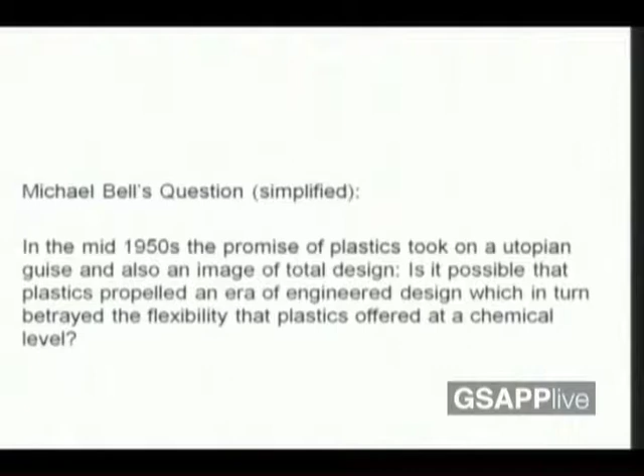I want to start with Michael's question. In the mid-1950s, the promise of plastic took on a utopian guise, and also an image of total design. Is it possible that plastic propelled an era of engineered design which in turn betrayed the flexibilities that plastic offers at a chemical level? And my answer is yes.

It actually depends if we're talking about plastics in the context of art, architecture, engineering, product design, or urbanism. Today I will talk about art and architecture because I feel they relate to the issue of plastic promise, total design, and betrayed flexibility, and also because I've been looking for an occasion to talk about this because it's part of my immersive interest right now. And so...

When we talk about art and life, we go to Warhol in some extent. So I want to be plastic. And so plastic is this - it's an immersive material. It's everywhere that we turn. Architecture is also everywhere, but at the same time, both architecture and plastic have the task of remaining unobtrusive, unnoticed. So at once they're everywhere, and at the other end, they're supposed to not call too much attention to itself. At least that's one of the ways in which I see architecture.

This is Michael Heizer's installation at DIA. It's a precipice of 20 feet, and he wanted to do it without a railing. We tried to convince the building department of the city of Beacon to do it without one. Luckily the building department was our alter ego and said no, you have to have a railing. That's a good thing, because on opening day my mom walked to the edge, thought it was a painting on the cement, and almost stepped in. So that's about risk and safety.

Andy Warhol again, and the Velvet Underground, and the Exploding Plastic Inevitable show. This show was in 1966 on St. Mark's Place. He rented, for $150 for one month, a place that was a Polish community center, one room, about 30 feet by 25 feet.

Now it's a mythical show, one that's in every book about pop art. But it was actually almost a pathetic event. Imagine a room in a community center on St. Mark's Place in 1966 with inflatable pillows on the ceiling. I want you to see this moment where you do something that's almost silly, but at the same time it's your guts out there.

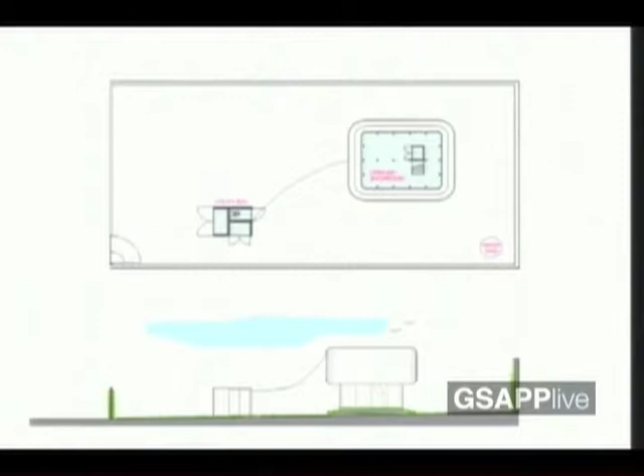Another thing that ties plastic to an important part of our lives is plumbing. Plastic carries water in an amazingly efficient way. Whether it's for fun, like here, or for piping and water tanks we'll see later, it does this very well.

Another thing touched upon yesterday was the idea of the brick having a textile quality, allowing us to lose sight of the fact that a building is made out of parts. If you put enough small bricks together, they disappear, like the weaves disappear in a scarf—they merge into the total form.

So this is a project, the effective brick—this is my ridiculous moment. I tried to take the brick to the limit of what it can be. This was a show at Artists Space, curated by an artist curator, and I tried to do a wall.

First I started digitally, and it looks more dignified when you look at digital images. But then when you go to the actual painting and mold making—we did 30 molds and cast 650 bricks, hydrocal bricks for this. All my students, some friends did this. Some molds are made of rubber and silicone.

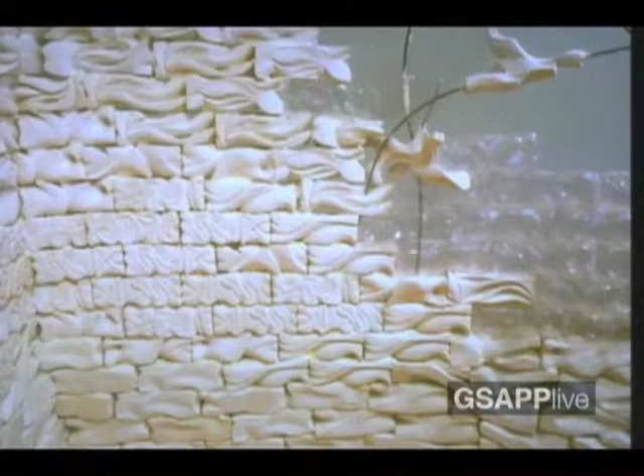And then I did these plastic bricks that are vacuum-formed styrene bricks, and that was it. I'm ready to do another version now—if anyone is interested in taking that experiment further, I am too. So that is the installation as it was done with 600 bricks at Artists Space.

The last thing I'll show you quickly: water tanks in Rio. Last year we had a studio on Rio de Janeiro and the Olympics, and one of the students, Nick Hopson and Clara Rodstrom, did this project consisting of 600 balloons that could reconfigure in different ways—for example spelling 'Rio 2016.' The balloons had water tank and internet functions within them.

A big balloon would collect water, with a gutter all the way around so it could collect all the water, then the water could be nested in the tank. The tank water could be filtered to become drinking water, and there was an antenna connected to it that provided internet service for the neighborhoods.

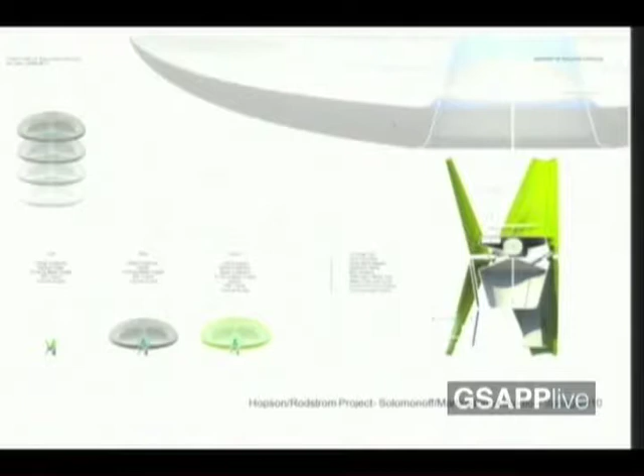At the beginning of the Olympics, they were all going to be grouped together. Everyone could log in—all visitors to the Olympics could use the 600 capsules as a telephone unit, or computer unit, and then they would travel to the different neighborhoods that needed water supply and internet.

So this is the balloon's kind of cycle: rising up, using air to transport, and being directed to a new location. This is a balloon at the pier, and that's a balloon in the neighborhood. This is the closing ceremony of the Olympics, where all the balloons would be let go together.

And so this is where I go back to Warhol and the idea of an amazing party—not an amazing party as a waste, but an amazing party because we deserve an amazing party.

Parties are what we've done since we were primitive people. It's what brings us together, it's what communicates. And so I imagine the event, the party, as being as important to the people of Rio as it is to me or to anyone here, and as a serious thing that an architect could get behind and design.

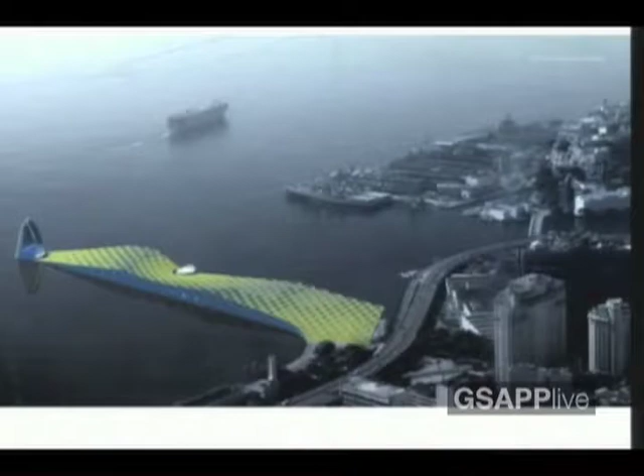And so this is the closing ceremony, all the balloons going to the neighborhoods. The pier now transitions into a market with some open air solariums, and the market is underneath. The balloons go to the neighborhood. This is the neighborhoods that we were looking at. And this is the post-Olympic landscape of Rio de Janeiro with the balloons in the different neighborhoods and the pier being a pier.

And then the last project that I'm going to show you, it's a pavilion that we're doing this summer. And so we look at the history of pavilions, a pavilion being an essay of architecture, kind of like it combines the ability to do something radical and extreme with the difficulties of building something.

So I don't want things to remain digital. I have nothing against digital anything. It's like, what I feel is it's much easier to look silly and ridiculous and exposed when you're dealing with materials and you made a miscalculation than it is to do that when you're dealing in the digital realm.

So we choose three pavilions that we really liked. We analyzed them. We analyzed all of them. And then I'm working with Liam Gillick, an artist.

So the question is, why do I bother working with an artist? Well, I'm interested in learning how to do things. I don't necessarily want to follow the way things are done anywhere. And that leads to an unsafe territory of experimentation that is often more at home in the artist's realm.

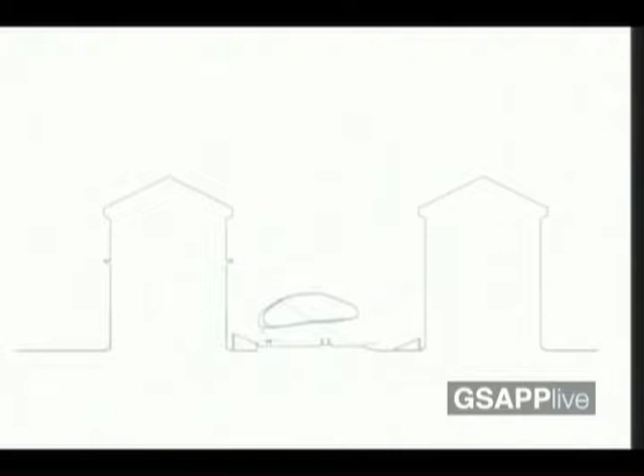And that's a public bathroom, that's a cloud, and that's the end. Thank you.

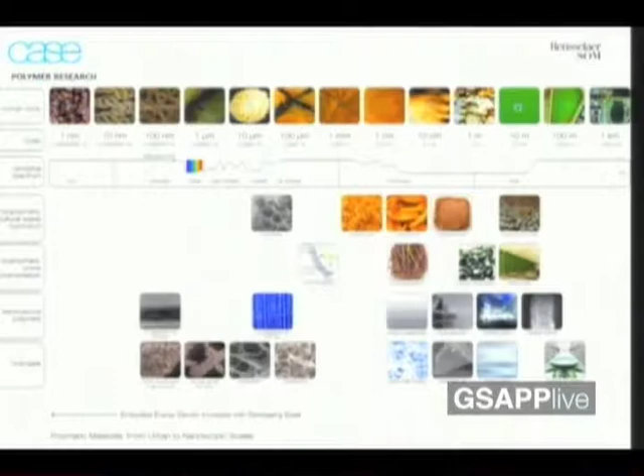I'm going to present this on plastics as a companion piece to what I presented at the Metals Conference last year, which was looking at how we manipulate a material at multiple scales—especially how we can now use computation to literally design the morphology of materials at multiple scales, potentially simultaneously, and look at those interdependent relationships across scale.

But what's amazing about the polymer family is that we're at a moment where we've extended ourselves so far in the engineering of materials that it's meeting something where our understanding of the geometry of biotic processes is converging with our understanding of the manipulation of materials, such that it might be so-called biocompatible material.

I'll use a simple analogy, since it's one of the materials we're working with right now: hydrogels, close relatives to contact lenses, or what you have in your eye. For those old enough to remember placing a glass contact lens into your eye, maybe 20 or 30 years ago, remember how uncomfortable it was to put ceramic into one's eye—but somehow a polymer is almost imperceptible.

It's an amazing thing, this blending of processes with a phenomenal level of engineering at an extremely small scale—all the way down to this kind of manipulation at the nanoscopic level.

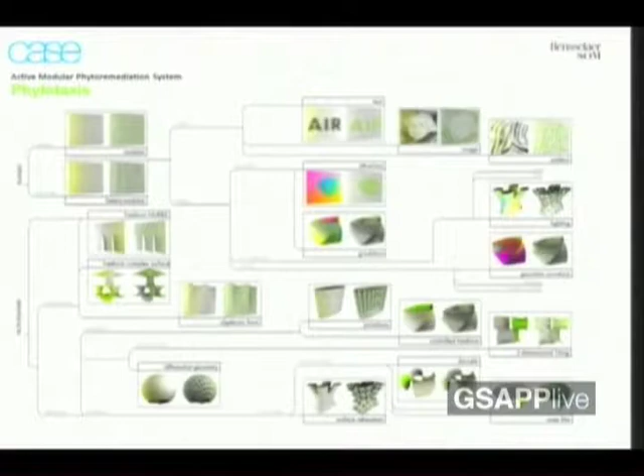We over-design everything, and we really don't understand those processes in terms of what we'd call built ecologies. So these studies are really looking at the relationship between the fluid dynamics of air, how it moves through a room, a building, or even a district, and then all the way down to that small scale, the micro scale of the root rhizosphere, and what happens when you go all the way down.

It just so happens that those images I just showed are plastic modules, and we're definitely looking at all of these existential questions relative to plastics, such as design for disassembly, reassembly, design for recycling, biopolymers, biodegradability. There are epic questions right now with respect to what we are doing with plastics and how they participate in future ecologies.

But geometrically, what's fascinating is another NASA discovery about the relationship between minimal surfaces and flow, which also emanates from biology. So I want to constantly reinforce that so much of these discoveries and our relationship to polymers show a crossover that is really coming to a head.

In our work, in a very particular way, we have these kinds of—I love Galia's characterization of a kind of goofy, ugly phase that things go through, because, to be honest, we constantly talk about our stuff as a kind of high wire act without a net, and this is one of them. This work is really proposing that you could produce fresh air from within buildings. Would they be airtight? Maybe. If you live in Bangkok, maybe you want a tight building.

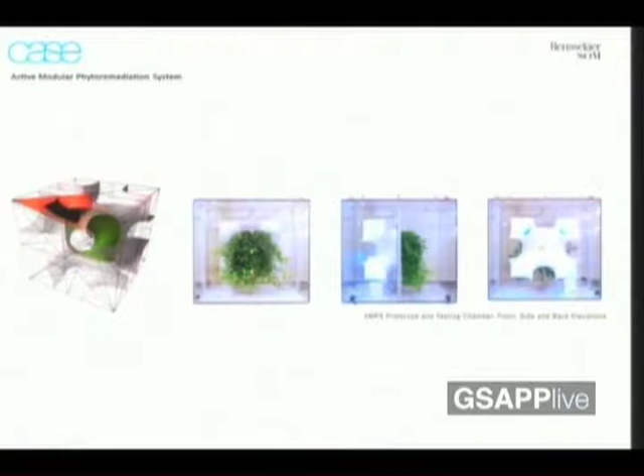In terms of the relationship between the manufacturing level and the biotic level, we're constantly looking at how much built material versus natural material we need, and what that relationship is. It's this ugly, awkward merging together of biotics, mechanics, and polymers into a performative prototype that can perform the best we know how with existing or emerging technologies.

It's certainly at a highly experimental phase. I don't know if we can come up to the ankle of the Slow House by Diller and Scofidio, but we're in a very investigative period looking at the relationship between flow. If you look at a square room, the question is how does the airflow go through it? It's in a very different form than what you actually see in front of your eyes. So what is that relationship between form and performance in terms of the dynamics?

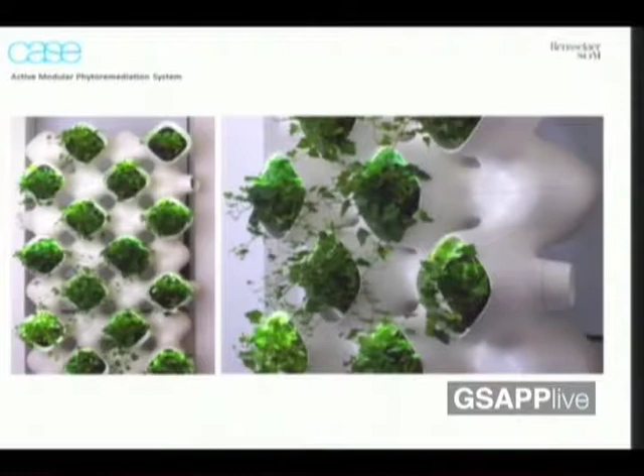This is an example of a prototype here in the lobby of Skidmore, Owings & Merrill, one of our partners, actually our principal partner at CASE. We moved this prototype through different capacities in different rooms, testing the remediation of toxins and the relationship between species and performance.

Ramping up in scale, looking at these large-scale constructions, a proposal that gets incredibly rationalized in this case, so that the optimal geometric plastic relationship to dynamic flow is not necessarily always viable in the real world, given certain constraints within constructions and the orthogonal architectures that we're placed into.

One of the aspects about dynamics and control that brings to mind—are we really comfortable with bringing natural processes and natural systems into our environment wholesale? There are huge cultural ramifications.

Going down in scale a bit into the filming of polymers onto substrates and materials is a very interesting possibility to have reactive conditions whereby the exchange of information is possible.

This is an area of inquiry we have looking at the adhesion of electroactive polymer to basically IGU units or window displays. If you think about ceramic frit that's fixed and non-reactive, we're looking at something like a movable frit that can be any pattern depending on what you program for it, or that can be opaque, translucent, and everything in between.

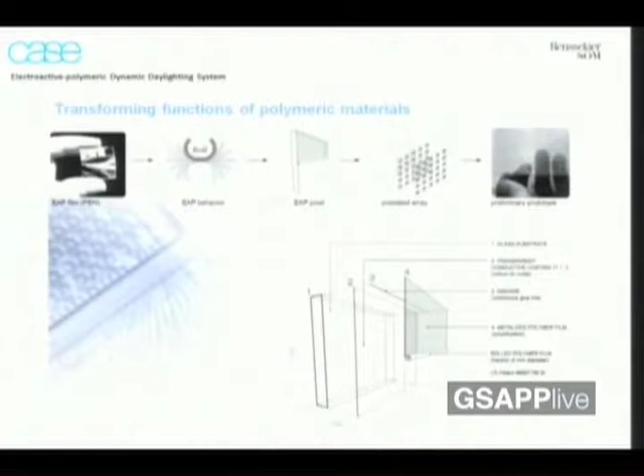Transparent is actually its default condition. It also can be scalable—you can start to sculpt space or change the shape of space. You can change the effective heat transfer characteristics of a building envelope very quickly within a switch, in terms of how it absorbs solar heat gain and responds to glare, etc., with geometric properties built into the microscale of the material.

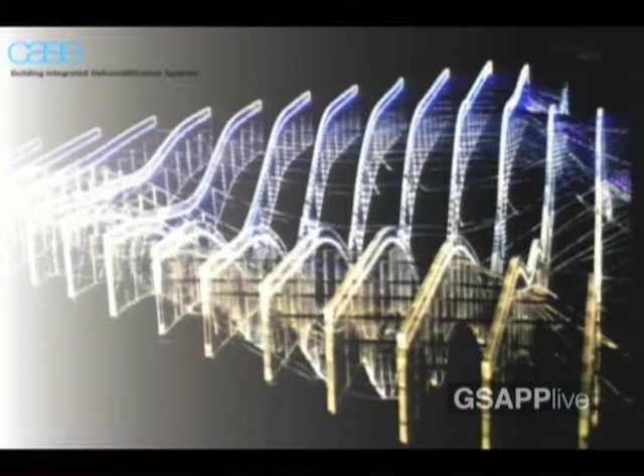I've just been given minutes, so I'm going to flip through quickly, since I think it's better to have an overview of the discussion. I mentioned contact lenses—this is literally a ceiling made out of contact lenses. It's an intelligent hydrogel geared towards hot, humid climates. In this case, there was a test bed for a projective building for the Mumbai airport.

So what we're really doing at CASE is projecting into the future with existing technologies, looking at a time period like the Mumbai airport. Galia's comment about water is great, because we think about the relationship between polymers and water like this—this is a hydrogel, a material that absorbs water and captures it for potable water purposes and redistributes it, also potentially changing the psychrometric profile of the city.

A city like Mumbai unfortunately has tremendous humidity in the air, but very serious water shortage problems. I probably have no time right now, so I'm just going to flip through these slides quickly.

I want to end on this note, looking at post-agricultural waste byproducts. I want us to think about polymers in a very large sense. There are manufactured polymers that have tremendous limitations and in certain cases serious nefarious effects on the environment, but we also have a very large range of polymers participating in

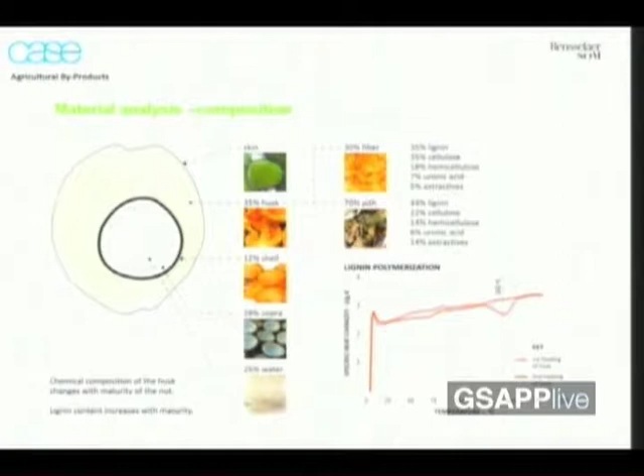many different processes that we have. If we look at the relationship between food production, the natural processes we're using, and how we're actually using them, we have enormous surpluses of so-called polymers that can participate in biopolymeric processes for building materials, for the gestation of different metabolistic processes within buildings, whether it be energy, water, toxin remediation, et cetera.

This is a very low-tech process—literally heating at a fairly low temperature coconut coir and coconut husk, of which the dramatic majority of these materials are wasted throughout the hot, humid belts that probably need them the most, because they're building with very heavy thermal mass concrete buildings predominantly now in these belts around the world, dramatically changing their microclimates and their requirements for cooling.

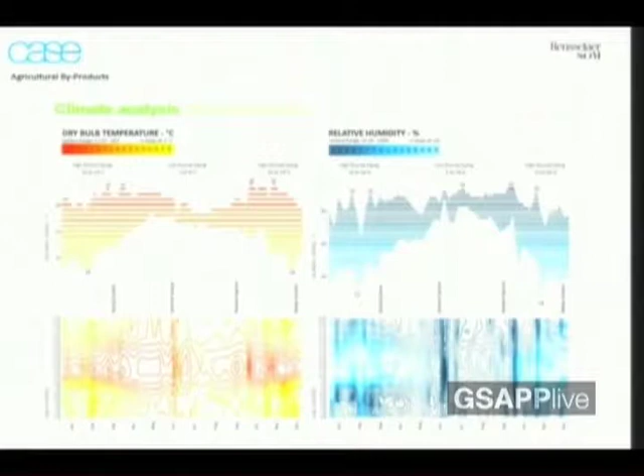These materials have incredible properties and behave in ways that can really look at that metabolization, and the relationship between what we have as natural resources and how we metabolize those resources within the built ecological environment we're putting out. I put that as an open-ended question, because I know someone here would really like me to move on. Thank you very much for your attention.

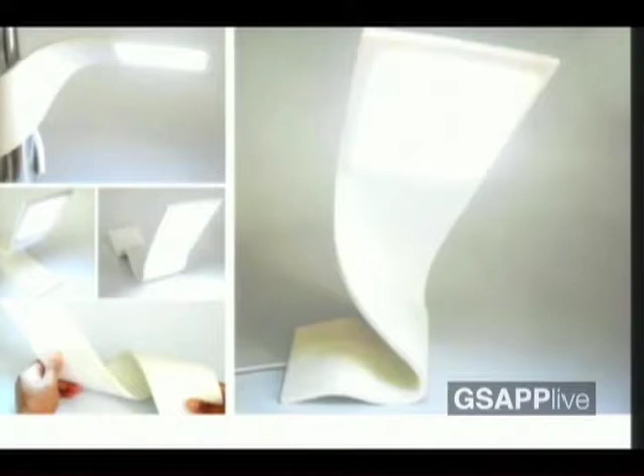We'll move along. So can we think about taking aspects of infrastructure and having architects focus on the architecture and the envelope in a new way? This is a project by a group in Argentina—we see soft plastics, soft lighting. How can we begin to think about that here at home?

Very quickly, and to be a little funny since we're talking about plastics today, I want to make the case against glass. In the case against glass, we have to think about what an ingot of silicon means in terms of embodied energy. You have to really heat it, bring it to a very high level. It's extremely energy intensive, and any solar panel would, of course, be made in this process.

And of course, not only is it made with a lot of energy, it's produced in buildings like this—clean rooms and so forth—that need to be supported by a lot of ducting, so the operational costs are very high to run, a lot of electricity and so forth. This raises a question: can we replace this material? When we replace this polysilicon or even this monocrystalline silicon solar cell with a new material, what are the possibilities? What can we do when we literally unroll that ingot of silicon into something that's very thin and flexible?

So there are a number of characteristics that emerge in this material paradigm of plastic power. It's cheap, it's roll-to-roll processed, it's relatively inefficient. Yes, that's right, it's not efficient. It's a kind of ambient surface harvesting, and it's ubiquitous, it's everywhere. It lends itself to flat production.

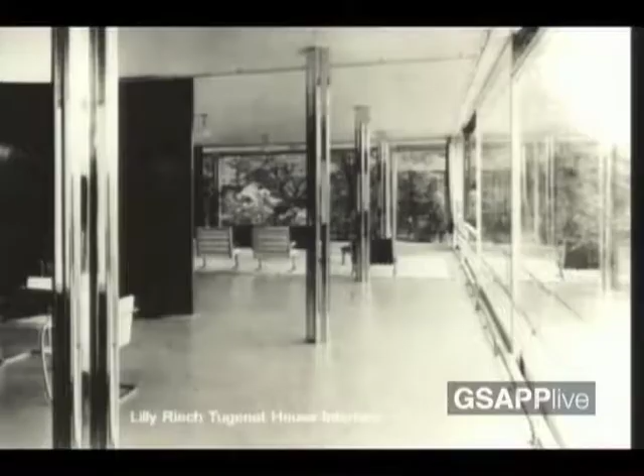So this is the kind of moment that we're interested in, this particular junction of the Tugendhat house, where the curtain, which would have normally gone along the wall, begins to depart, and begins to come across and become complicit and somehow equatable with the architectural partitioning schema in this project.

And so that leads us to the last project I'd like to show, which is the Soft House project, where we attempted to take a very familiar material, a textile curtain, and ask it to do two other jobs: to harvest energy and to produce light, and also to use the curtain track as a distributor of DC energy.

So that it could power all of these things relatively effectively without having all the power supplies and paraphernalia that we see here, because this house is AC, alternating current, and it's just not that effective to power alternating current appliances like everything in your house with DC-powered solar panels.

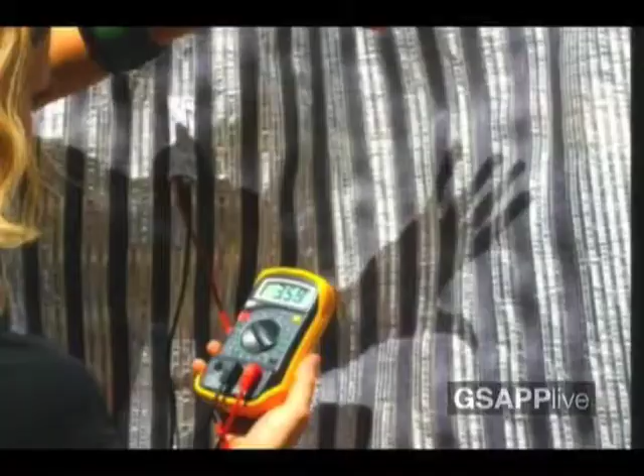So very briefly, you may be familiar with this project, but it's conventional. There's a track system east, south, and west. We also developed a vertical curtain, which you can see here, as a way of densifying the photovoltaic material. We made a lot of different material prototypes, and we have a chance to test out this project.

And realize it with the International Bauausstellung in Hamburg in a set of prototype row houses that will be built in 2013. I should say that Jan Knippers, his firm Knippers Helbig, and also Buro Happold are working together on this project, as well as Jan Cremers. So this is a row housing design and an operating system for this very low light level situation in Hamburg.

And we have textiles that are creating a twisting responsive facade. The underside of those textiles are reflective, so that they reflect light into the house. You can see the cross section here, very simple.

A soft duct, that's like a sort of soft chandelier that moves up and down. The sets of interior curtains that distribute light and energy, and then the exterior textile, all of which are polymer materials, PET recycled on the inside and PTFE on the outside.

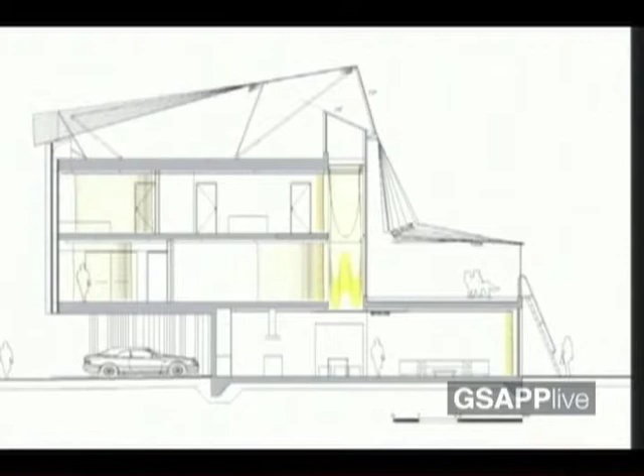And I'll just conclude by showing you a little bit about how this adapts over time to close itself off, open itself up, and actually adjust to the kind of very radical shift that occurs in the different seasons. So this is the operating system of the house.

We're using MIT's processing open source software here to control, to have piezo sensors, so that as the wind blows by, a different set of lights can appear. If you want to see a visual breeze, you can take the exterior weather and kind of pull it right into the house. So really what we're trying to look at is a kind of diaspora of the envelope.

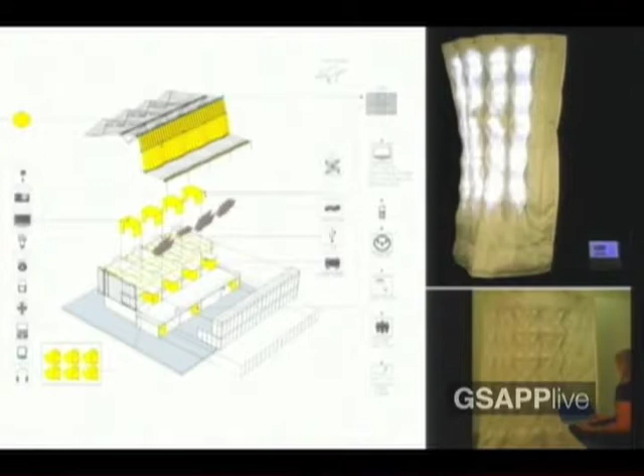A kind of unpacking of the singularity of the wall and its elaboration into a series of flexible layers. And we're trying to recover an exacerbated materiality of energy harvesting textiles, and a new spatial experience which could be moved and calibrated to different preferences in a very low carbon form of construction.

So physically and performatively, the skins are reflective, and they also have the capacity to provoke a kind of rhetorical reflection around the particular contemporary cultural moment that we have today of infrastructure transition. Thank you.

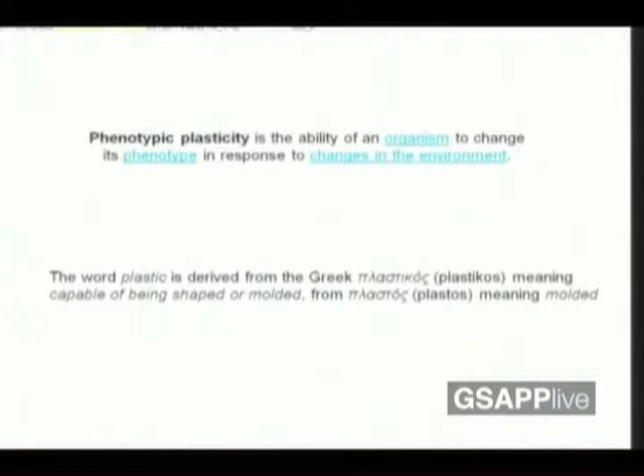So we have gone through our little history of work where we're trying to look at plasticity or fragmentation as optimization, to see whether you can start to fold and bend materials to get passive solar energy, to get a high level of opacity, to diffuse membranes, and start thinking of new connections between exterior and interior, privacy and public spaces.

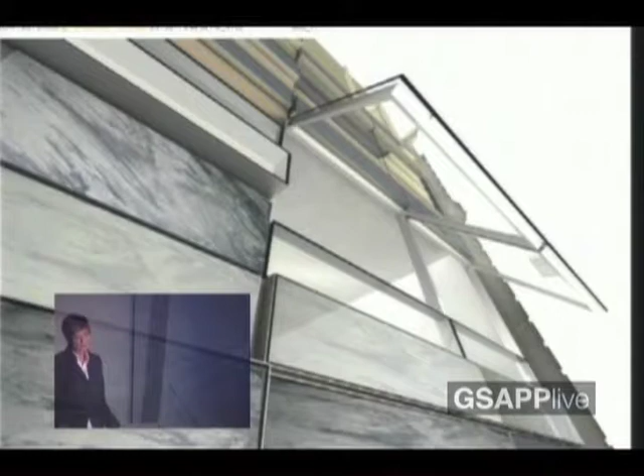So this kind of constant research also goes very often into plasticity as a new way of looking at transparency - transparent stone, translucent glass - and the way you can research that and start to use plastic mostly as a connective membrane, where we combine materials and layer them to optimize behaviors and performance of these new materials.

And of course we know all the plastic qualities of poured-in-place concrete, which is maybe not that ecologically responsible, but still one of the most easy materials to work with as an architect if you want to think about space, spatial continuity, and plasticity. So I'll zoom into this project a little longer, because you're probably dizzy from the flickering images at this point.

This project is one where we started working with, we work typically a lot with MIT Media Lab, as Sheila was also mentioning, which I think is really important for architects, not just to work with MIT Media Lab, but to work in general with people like Anna, with engineers. I think that's also why this conference is super important, to understand architecture much more as a big team of specialists, but to cross-reference this specialism in different areas and gain knowledge quickly. My trash story goes back to that same issue, that it's really important that we work together with people in robotics, in science and technology, to advance both architecture and spatial conditions, to work in developing countries like Sheila was working in Africa.

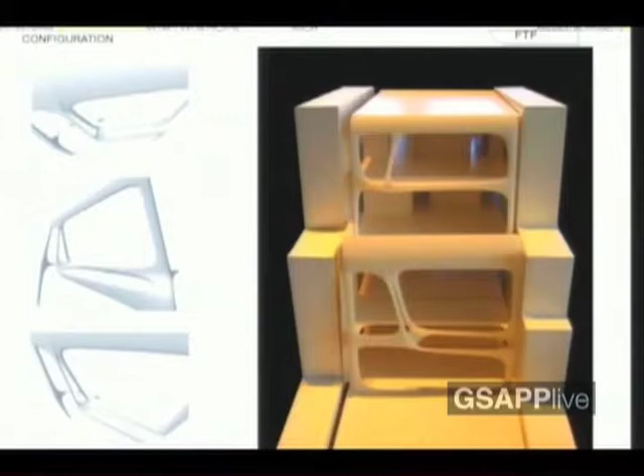The idea here is we worked on this particular project with a friend of mine who has the largest independent car design company in the US. We developed a series of facades from reclaimed wood, where we're kind of lucky that the facade width exactly matches his robotic 6-axis CNC milling machine. The facade can basically be milled with quite efficient methods with very, very little loss into this back facade.

We're also looking at ways, this is just a set of bumpers of car modules, to optimize manufacturing so that we don't go back to the prefab idea of the 70s, but instead go back to ways of building things in clean workspaces, to have quick assembly times at our work spots or construction sites, and to actually start to minimize trash. I think that's going to be really important. It's quite shocking to me how much trash we produce, but especially on construction sites, it's gigantic.

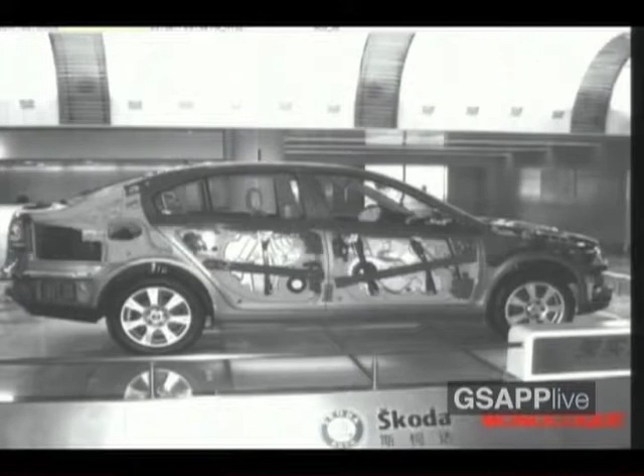The other thing we're all very jealous of is that our cars can open windows by just pushing one button, which I am still trying in my house and it has never really worked. So this is the technology you need for that thing to work - it's not exactly simple, but it's definitely something to think about. Why do we accept that our cars and our moving environments are very easy and comfortable, and why is our actual living environment, where we spend most of our time, so far behind?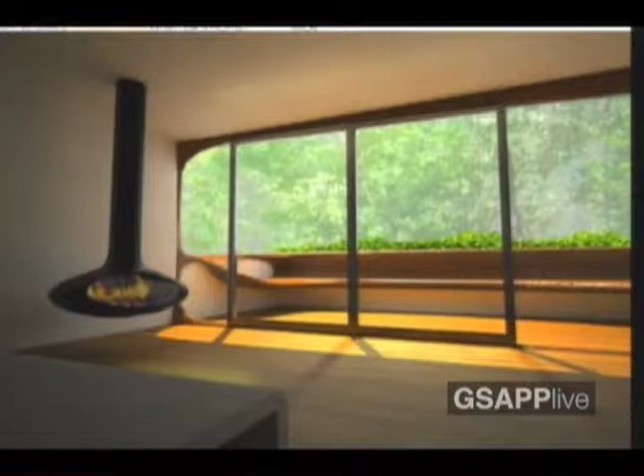A set of doors which are also made by the same man. Then a project we just recently finished in Shanghai is for Ports. Actually, the house you just saw was for the creative director of Ports. After working on the house, they were basically quite happy, so they gave us all the Ports stores.

The first one we did was in London, a very small shop-in-shop in Harvey Nichols. The second one is the large flagship store in Shanghai. We started thinking - you all know Shanghai is a large port, and what's quite interesting is that it has, this is the shop, it's on the Bund, right on the border, and Shanghai has this amazing history of Art Deco.

Art Deco is an interesting, one of the few interesting styles I think in architecture history, in the sense that it has moved from a very Art Nouveau, pastel, very soft form of design into something which became quite futuristic and sleek.

So it has had a beautiful transgression, and our idea was to keep going in that transgression, to extrapolate that information into the space. We started looking at the history of boats, recycling of wood, and seeing whether this idea of the liner or the organic shapes could be used in the space.

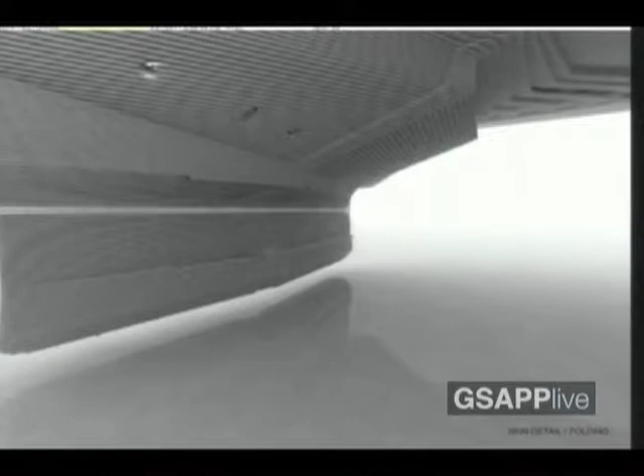So the first thing we did is we lined the space with this kind of CNC milled wood. Actually, Klein and I bought an old Chinese house where we used the wood for the walls to create an intelligent liner which contained all the space would need, which is air conditioning, lighting, hanging for the collection, vitrines, all that stuff.

And then we were quite interested in the roughness of this wood and started thinking about the contrast of maybe what an oyster would be. So you have the rough outside and the very, very pearly inside.

So here we distinguished areas, where the outside liner is more about showing the collection. The inside is much more gallery-like, because this is their haute couture line, it's very much about pieces which are tried and ridiculed sometimes, and how they themselves want to advance their fashion. So it's also where they show their new pieces and the way they want to start to rethink it.

We also were interested in the way we can now create surfaces which give in to carrying things, supporting things, or lighting things. So the small tables are developed to puncture the wood, the wood gives in, and it incorporates lighting, which lights these elements from below.

And these are just the very first shots we just got back, it's just finished. You start to see some of the elements, the units in the foreground where the lighting is incorporated. This is a little bit more yellow than it usually is, but all the lighting is LED. It's a very flowy space which starts to calmly give a background for the whole collection.

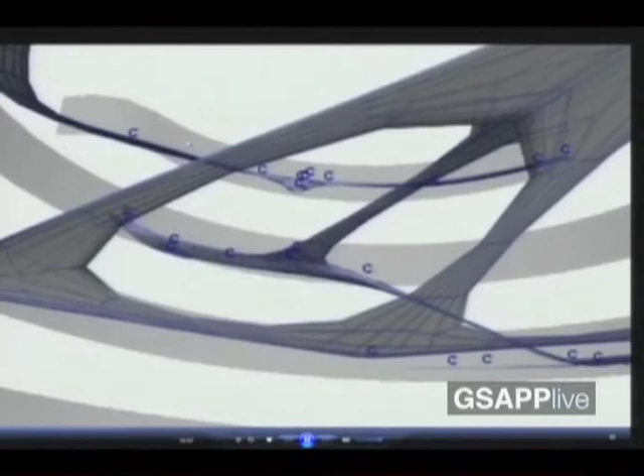So we started looking at unpeeling the voids, taking the spiral of the Guggenheim, starting to pull it towards the middle and really plasticizing it. So the idea was to start to think of the plasticization as a kind of form of creating new spaces, which would actually, in a way, show the Guggenheim as an art piece.

So by now hovering in the middle, you look back at the Guggenheim, and the Guggenheim itself is an art piece, or from the Guggenheim, you would be the art piece. So it's kind of an interesting moment where maybe this whole idea of museum can be turned inside out, and in a very interesting way, these kind of moments where we consider what is art, what's reality, and how we deal with that can be inversed.

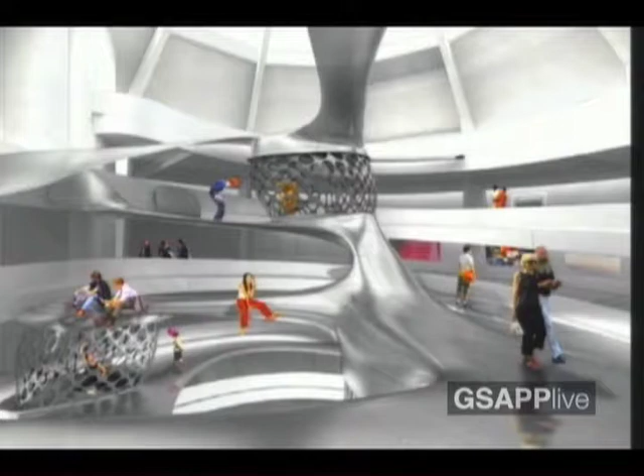Let me see what I can go back to. Yeah, so basically it's this kind of idea of nesting in the middle, the moments that you can then occupy these nests and sit in the middle and see whether you want to enter the museum or not. It's a moment of hesitation, it's a moment of contemplation.

And in a way, it would actually integrate the Guggenheim - maybe if you could have a commentary on the Guggenheim, on the idea of linearity, and whether you could make this museum non-linear. So now you can take shortcuts, you can start to rethink how you want to walk, and actually revisit the whole idea of the Guggenheim. Thank you.

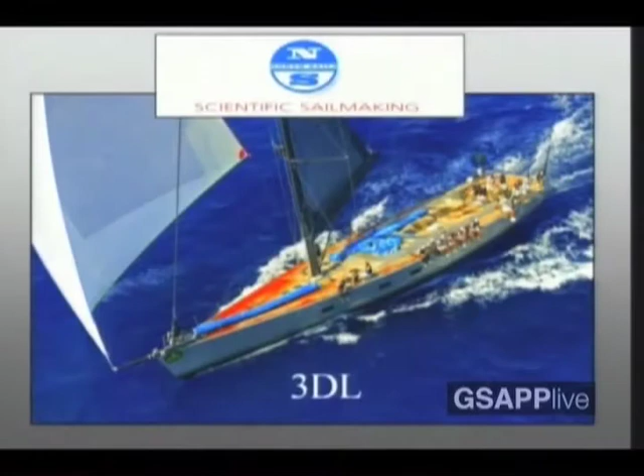As sailors and sailmakers, we have somewhere between little and nothing to do with architecture per se. However, we're all about design for composites and the efficient use of appropriate materials. So when a sail designer begins a project, he needs to take into account form, materiality, process, and structure. If he doesn't integrate those four components into the project at the beginning, it's going to go pear-shaped on him before he gets to the end. This is a way of stating explicitly what Greg Lynn was talking about implicitly last night, needing to use all those components of composites at the design stage, or else you're in danger of moving into Greg's composite tectonic nightmare, where you've got a sexy curvaceous carbon fiber structure and you're screwing or bolting cladding onto the outside of it.

In this photograph of a 105-foot race boat, which I sail on frequently myself - I'm back there in the corner - everything in the picture, with the exception of the white nylon spinnaker out the front of the boat, is a composite structure. The hull is a carbon fiber composite structure, a sandwich skin structure with a foam core. The mast is a monolithic, one-piece carbon fiber structure. The sail is a flexible carbon fiber composite structure. And even the lines, which we call stays and rigging in the marine industry, are fibrous materials, PBO, and increasingly now carbon fiber as well.

As most people at this conference would understand intuitively, for performance sporting applications, composites are absolutely the norm. In fact, it's increasingly rare that anything made for maximum performance would be made out of anything other than composite materials. The reason is simply that in performance sport applications, there is an insatiable demand for increased stiffness and lighter weight, basically at the same time.

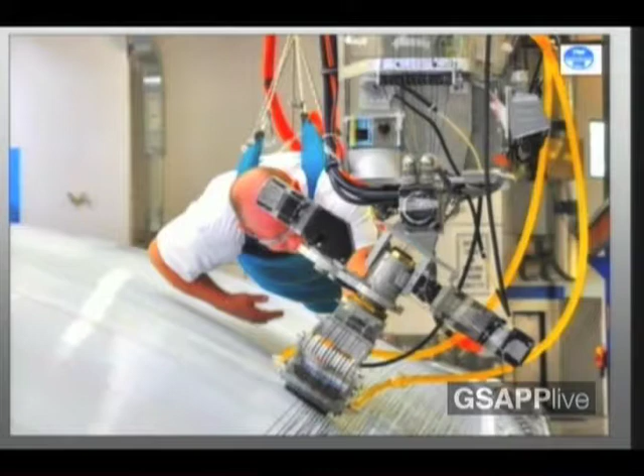Modern sails are made using computer-controlled robotics to achieve bespoke fiber placement on large articulating curved molds or tools.

In textiles, stitching is the method of mechanical fastening - the dreaded nuts and bolts of Greg Lynn's nightmares. And, you know, most things are thus, or were thus.

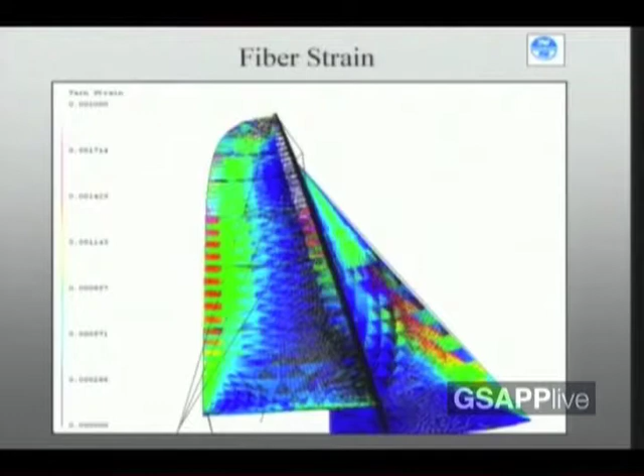There's a view of a relatively simple fiber architecture on a small racing sail. This is a one-piece molded sail. You can see that the fiber orientations in a modern sail are asymmetric, and asymmetry is efficient both in terms of performance and in terms of material economy.

I talk about asymmetry in opposition to the formal symmetrical microstructure of a woven textile, where you've got the same material, same amount of material across the surface, whether you require it for your structure or not. It's there because of the way the material is manufactured, not because of the way it's necessarily used.

So again, in a modern sail, we place the fiber in anticipation of the wind loads and the variations in the stress field as the boat moves through the waves. Varying orientations and densities allow us to optimize locally for strength and stiffness.

The process allows us to put fiber in the sail only where it's required on an as-needed basis, allowing us to make the lightest possible structure for any given application. So in this scenario, material economy is a win-win-win.

Material economy is good for performance because a lighter structure is better. Material economy is good for cost because if there's less material, the structure costs less to manufacture. And material economy is, of course, good for environmental reasons as well.

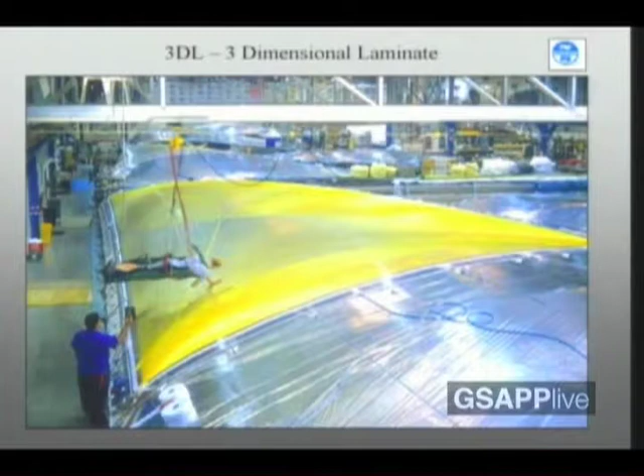So this is a shot end-on of one of our adjustable articulating molds. This is the surface up here, which we change the curvature or shape of with this pantograph lifting mechanism. The surface is adjusted on a bespoke basis, sail for sail. So this is mass customization in practice. The process is the same for every different sail, but every sail has a unique structure, a unique geometry, and unique aerodynamics or shape.

There's 240 lift points underneath this mold, and each one of these pantograph lifters is attached to a vertical screw driven by two pneumatic actuators. So 2 pulses from each actuator is one 360-degree rotation, so the accuracy in the Z direction, in vertical space, is a quarter rotation of that screw. It's effectively within a millimeter, which is pretty accurate for such a large platform. You can kind of see underneath how fair the surface is for such a large tool.

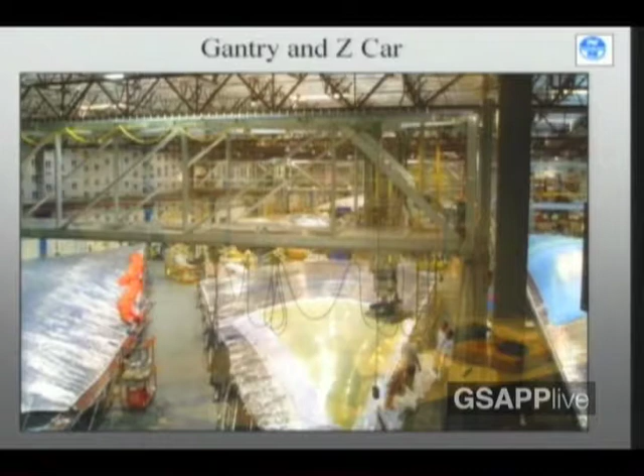Off the overhead gantry, there's a robotic arm that moves in the Z direction, and on the bottom of the arm we attach different tools used in the manufacture of the sails. The most important tool being the fiber placement head. It's a 6-axis PLC-controlled head that lays down the fiber architecture. The head follows the 3-dimensional curvature of the mold, and it draws a pattern in yarn reflecting the anticipated loads in the sail.

You can kind of see an end-on view of the fiber matrix there. There's a corner of the sail, so the greatest density clusters. The fiber fans out across the body of the sail along basically catenary curves.

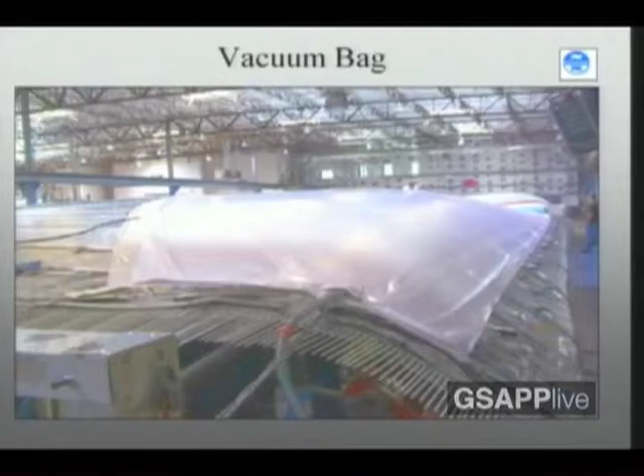And then we build a vacuum bag around the laid up materials, just like you would do with any other composite part. We draw 1 atmosphere of pressure, and in our case, we heat up the laminate to about 300 degrees Fahrenheit in order to flow a thermoplastic adhesive. And when you're done, you pull off a one-piece flexible structure that's got the shape of the sail molded in. So the shape the sail is going to have when it's up on the boat and pressurized is set permanently into this flexible laminate.

So this process is roughly 20 years old now. For the last few years, we've been working on what we're hoping will be the next generation. In our business, we're all about better use of existing materials. Sail design is modulus driven, so you're in a constant pursuit of trying to find a way to get more effective modulus in your membrane using the materials that exist at hand, that everyone else can use as well.

So the structures I've shown you photographs of being built, we call load path structures. We're laying down fibers, yarns, or tows, which are in fact bundles of filaments. What you think of as a single yarn or carbon fiber tow is a bundle of 3,000 or 6,000 or 12,000 individual filaments. The mechanical properties of the filament are actually superior, particularly in stiffness or modulus, to the mechanical properties of the complete bundle. So there is some efficiency to be made if you can use the base material of that filament instead of using it in the bundle form.

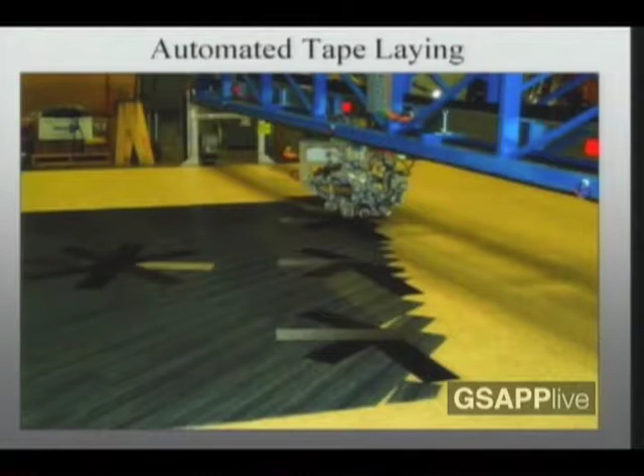We're going to plot down different orientations of tapes, different densities - in the composites business this is called a preform. So we're going to take this preform section and move it over in one piece onto our adjustable molds, build a vacuum bag around it, and laminate it just like the other parts of our process.

So I'm being told to wrap up here.

Very quickly, this is a photograph of an America's Cup race boat. It's got one of these fiber composite sails, the head sail on the fore part of the boat, and one of our load path 3DL sails as the aft sail in the background there.

An important aspect of this new sail is there's no longer any film or substrate in it - it's only a matrix of fiber and composite. The traditional distinction between structure and surface has completely gone away. They're inseparable; you can't even discern the structure anymore. This is not a load path structure, what we call a quasi-isotropic structure, where the surface and structure are completely integrated.

I won't dwell too much on this since Greg showed it yesterday. The interesting part for me is that the structure exists somewhere in the intersection between a composite and a textile. It's formed like a composite, built with composite materials and processes, but it's somewhat flexible - you can fold it or roll it. In static mode it's a compression structure, and when loaded it turns into a tension structure, which is part of the quasi-isotropic nature of these materials.

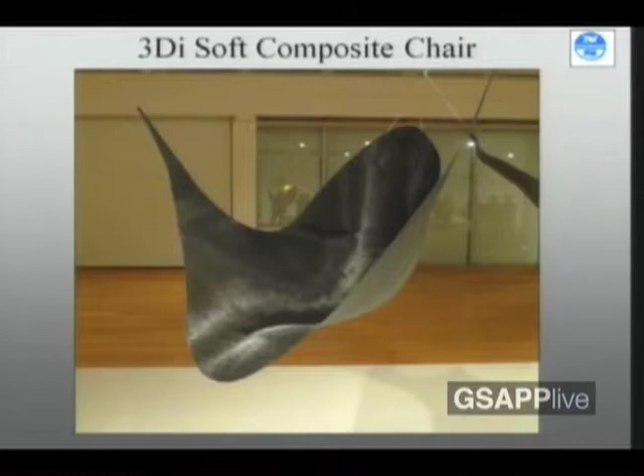I guess maybe that means I'm done. Can I get that back?

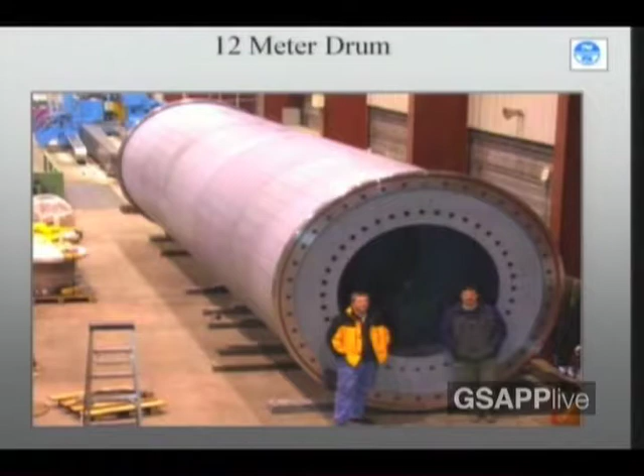It's 12 meters long, and those holes in the barrel of the drum are used to fire pistons through from pneumatic actuators - 2,600 actuators inside that drum fire pistons through to deform the surface into an aerodynamic shape, continuously changing as the drum turns and as materials are fed into it. So raw materials go in one end, and out the other end comes a string of individually shaped, bespoke sails that are attached, then sliced up and removed from the drum.

Okay, so I'll finish there. I probably don't have time for my 4-minute video - highly entertaining. But thank you.

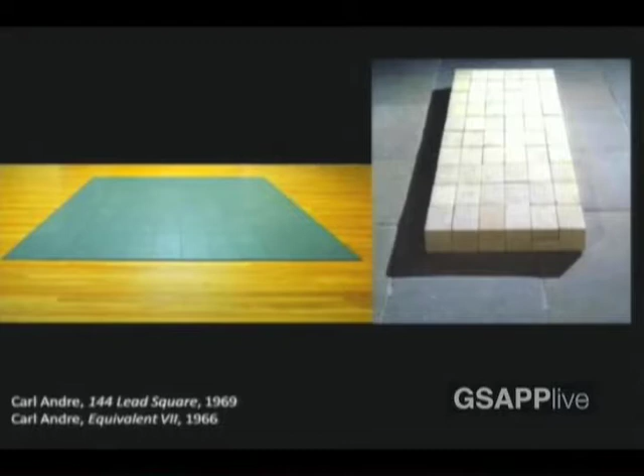The very scope of such systems-based work, Burnham argued, necessitated interdisciplinary thinking, a refusal of the boundary concepts through which modern art had operated. Consequently, as he put it, some of the more aware sculptors no longer think like sculptors, but assume a span of problems more natural to architects, urban planners, civil engineers, electronic technicians, and cultural anthropologists.

It was at this point Burnham returned to Levine, whom he referred to as methodologically the most consistent exponent of a systems aesthetic. Levine's Clean Machine has no ideal vantage points, he went on, no pieces to recognize as are implicit in formalist art. One is processed, as in driving through the Holland Tunnel.

Certainly, he goes on, this echoes Michael Fried's famous reference to Tony Smith's nighttime drive along the uncompleted New Jersey Turnpike, yet if this is theater, as Fried insists, it is not the stage concerned with focused upon events.

In addition to having moved beyond these so-called boundary definitions circumscribing conventional art mediums, Burnham noted that Levine's visual disengagement extended to the point where, in a recent environment by Levine, rows of live electric wires emitted shocks to passers-by. Here, behavior is controlled in an aesthetic situation with no primary reference to visual circumstances. As Levine insists: what I'm after here is physical reaction, not visual concern.

So the work, entitled Electric Shock, as you see here, was indeed intended as an extreme case of an artwork confronting the beholder, a work existing only through the participation of the viewer in a quite literal sense.

As Bourdon argued in a Life magazine feature on Levine, this piece consists of a completely bare room equipped with a row of overhead wires creating a false ceiling a few inches above the spectators' heads. At regular intervals, a high-frequency generator charges the wires with electrostatic energy, giving a jolt to any spectator who happens to touch them, as well as anybody they happen to be touching. People are drawn together or apart because they can hold hands and get a charge from one another.

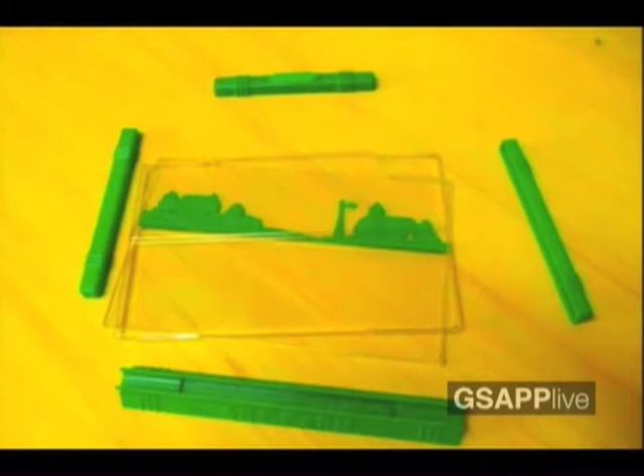Also, the ants worked collectively, and now we know that the hive has a greater intelligence than the individuals do. And then it was also a kit of parts that you would put together, and it was high tech in a way as a toy. And of course, it was also plastic.

And finally, the ants built underground these really interesting spaces, and of course above ground was a very conventional architectural scene. So it was a perfect metaphor for what we were engaged in, but really we wanted to be rock stars, I have to admit. This is the album cover.

In 2004, the Berkeley Art Museum mounted a retrospective of Ant Farm. Ironically, the building, the Berkeley Art Museum, is another classic of brutalist architecture designed by Mario Ciampi, I think, in the mid-60s. Ironic in the sense that the kind of architectural experiments we engaged in were symbolically the opposite of brutalism. They were experiments with the most lightweight structures, to wit...

...a surplus cargo parachute is what we started with. And it had this wonderful quality of being interactive, and you see Kelly Gloger here is controlling the shape of the architecture. And you could also ride in it. So it was interactive, and it was lightweight, and it was transportable, and it left a small footprint.

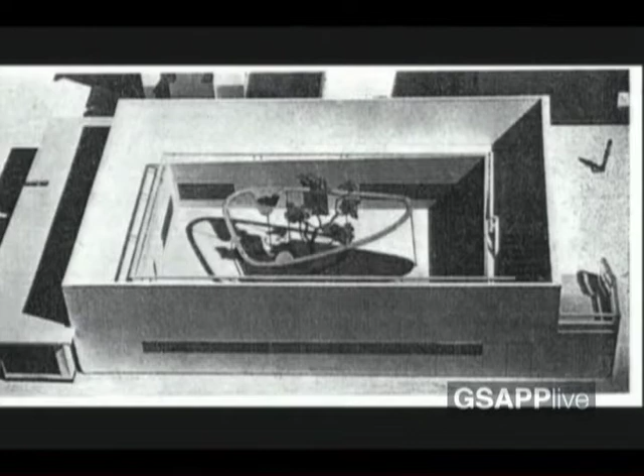Very quickly, 1956, outside it was a wooden rectangular box with almost blank walls, and there was a House of the Future somehow flashed on and off, projected into one of the larger, longer walls. A small opening to one side, I don't know where—yes, here. To one side here, very discreet, right, acted as the entrance.

And inside there was another blank box, more or less like this, which visitors would circle around, peeping at ground level through these openings that opened into the side of the wall only for that purpose. It doesn't mean this house has these windows—this is just for the exhibition.

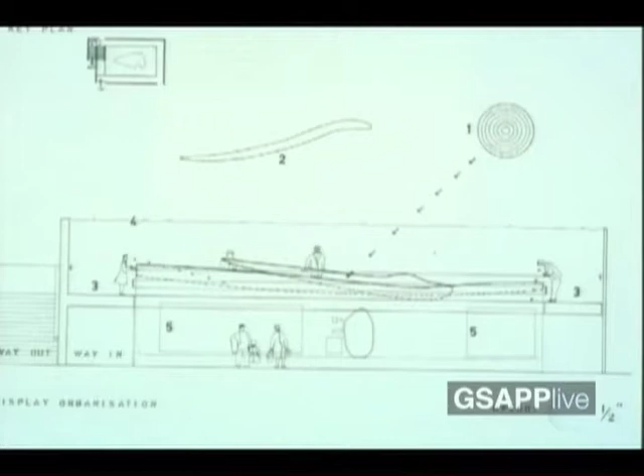Before ascending to this upper level, where a viewing platform circled the inner box again, allowing a bird's eye view of the interior, before leaving the outer box through another discreet opening and descending on the grounds of the vast Olympia exhibition hall in London.

The mysterious structure, which you can see here and also in the bigger plan, right there at the end of this Avenue of Tomorrow. This mysterious structure had been commissioned by the Daily Mail for their Jubilee Ideal Home exhibition and displayed there for exactly 25 days in March of 1956.

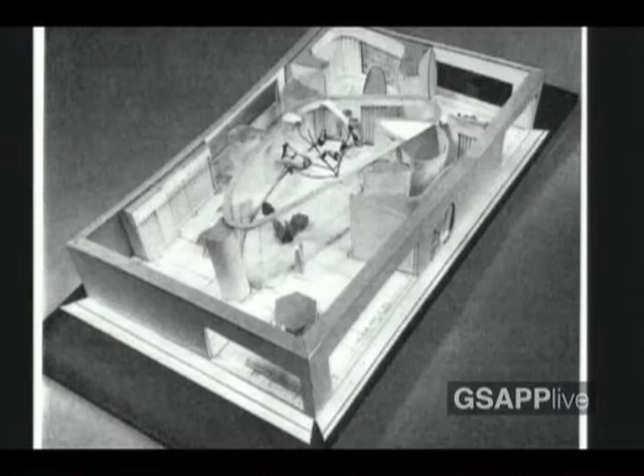Now, how are we to understand the House of the Future today? How can we discuss now a house of 1956 that tried to imagine the future of 1981? That is, in other words, how can we look back in order to look forward?

For years, the project was considered or ignored as an anomaly in the careers of Alison and Peter Smithson, a project that didn't really fit with anything else they had done. It was indeed much discussed at that time. Banham was very enthusiastic about the house, called it the first example of a pop architecture, etc. But then it was somehow forgotten from everybody's memory, almost disappeared, until the last few years when it somehow regained some currency.

Now, why is that? After half a century of ignoring, the house seems almost impossible to ignore. Is it because...

Somehow the sinuous curves of the house resonate with a renewed interest in biomorphism and the growing sense that new moldable materials are a driving force in architecture, as we were talking yesterday, and as we saw yesterday with Greg Lynn. Also, we ended up with openings that are a little bit out of the Flintstones in the entrance of the House of the Future. Or is it perhaps a contemporary fascination with the 50s and with British pop in particular?

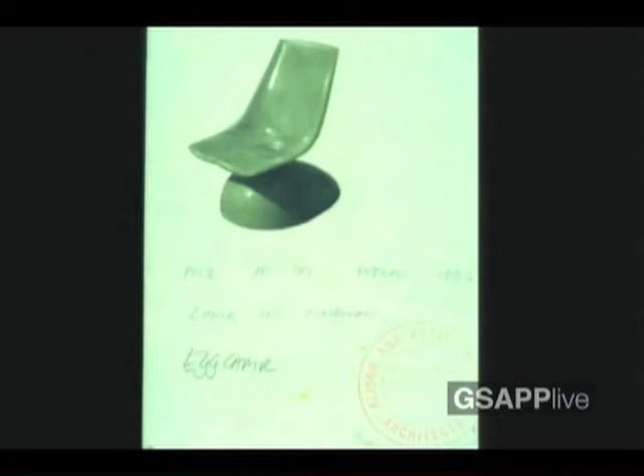There is the egg chair — because most of the photographs are black and white, I have to tell you the colors. One was in honey color and the other citrus yellow. There is the petal, one of which was pimiento red and the other honey color, and there is the white saddle. All of those I just mentioned were molded in reinforced polyester resins and seem to share the character of the double-curve modeling of the house itself.

Here are the molds for these chairs. In any way, we continue.

The kitchen sink, the sunken bath, the cubicle for the shower were all made of polyester fiberglass molding in pimiento red. The mattress and the headrest for the bed were made of latex and covered with nylon sheets. The curtains, also the somehow orange curtains you have seen all the time, are also plastic — fiberglass curtains.

In the living room, there is this cushion that is somehow also made of a blue nylon fur. I never realized the suspended cloud was envisioned in pale blue nylon stretched over a light metal structure.

The working surfaces in the kitchen and the cupboards were all in peach pink Warerite, and even the food had been packed in airtight plastic containers. House Beautiful actually described the house as a Wellesian fantasy in plastic, with herrings wrapped in polyethylene and eggs without shell individually packed in little plastic sachets, the whites separated from the yolks.

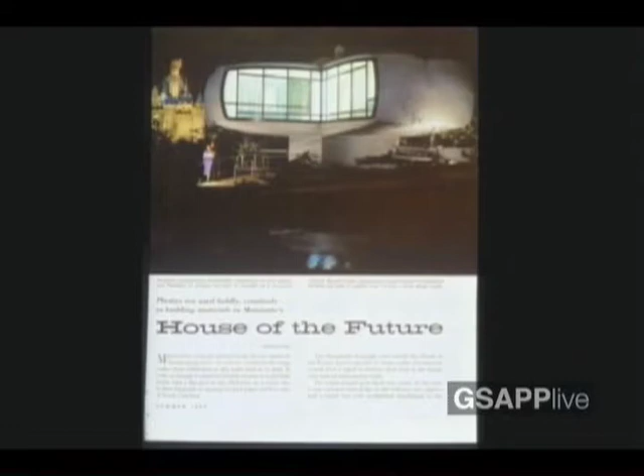In Disneyland of 1956, the Monsanto House, and also Ionel Schein's Maison Plastique, and his cabines hôtelières, also from 1956.

If 1968 is the year that, as Jeffrey Meikle says, the art world discovered plastic, one can say that '56 is the year architecture discovered plastic. So we can say that for once we were first.

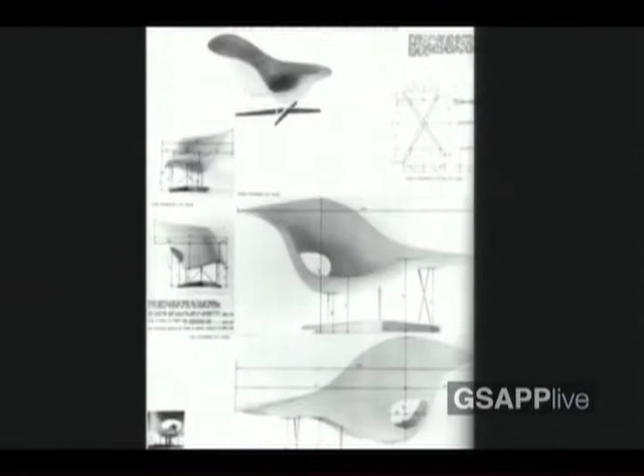It's also around the year of the Eames fiberglass chairs, which is also very close to the logic of the House of the Future. The Saarinen tulip chair, actually, is precisely from that year, 1956.

In other words, the house then, like a plastic consumer product that is supposed to be mass-produced and assembled like the molded panels of a car.

But this is the thing, the House of Plastic learned from plastic. It had the aura of plastic, which is, of course, the dream material of the time.

Popular magazines had been heralding the arrival of the new material for some years. For example, there's this 1952 article in Life magazine called Houseful of Plastic, which catalogs the endless plastic contents of any American ranch-style house. A house, any house, according to Life magazine, could be turned into a dream house by simply filling it with this dream material.

Four years later, experimental architects were turning the container, the house itself, into plastic.

But the house of plastic was also understood by the press as a kind of plastic polemic. Article after article points out every plastic feature of the house, plastic everywhere. If you can read it there, plastic niches, plastic walls.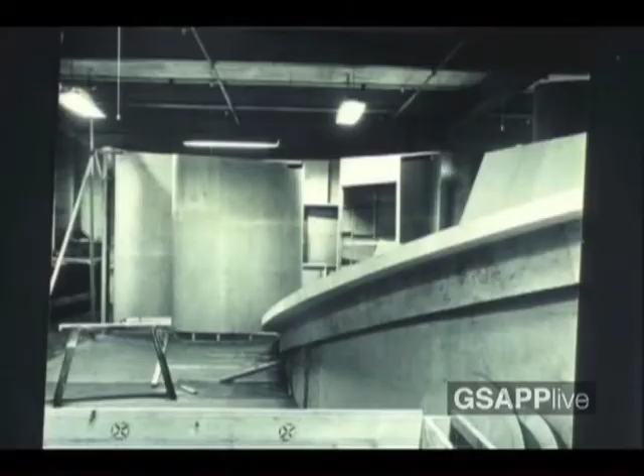But in fact, what is amazing is that the plastic house was actually not made of plastic at all. It was a simulation, a full-scale mock-up in plywood, plaster, and emulsion paint, very traditional materials collaborating to produce the effect of a continuous molded plastic surface.

As Peter Smithson put it, it wasn't real, it was made of plywood. It was like a design for a mask, like theater, end of quote. So it was make-believe then.

Even the transparent plastic wall to the garden of the house was fake. What appears to be the plastic enclosure is really thin chromium wires tensioned between the floor and ceiling, creating for the viewer the illusion of a curved transparent wall molded in reinforced plastic as described in the brochure of the house.

When in fact the opening was left unglazed, as you can see here in this picture, where a piece of clothing is just left hanging right there over the edge, in case you missed it.

Anyway, the Smithsons saw the tradition of these temporary theatrical structures as a centuries-old tradition going back at least to the Renaissance, when architects were commissioned, for example, to do the architectural settings and decorations for the wedding of a prince, or for the birthday of a ducal daughter, or for the entry of a pope into a city-state.

These events, Peter Smithson said, were used as opportunities by architects for the realization of the new style, a new sort of space made real perhaps for a single day — the transient, enjoyably consumed, creating the test for the permanent, end of quote.

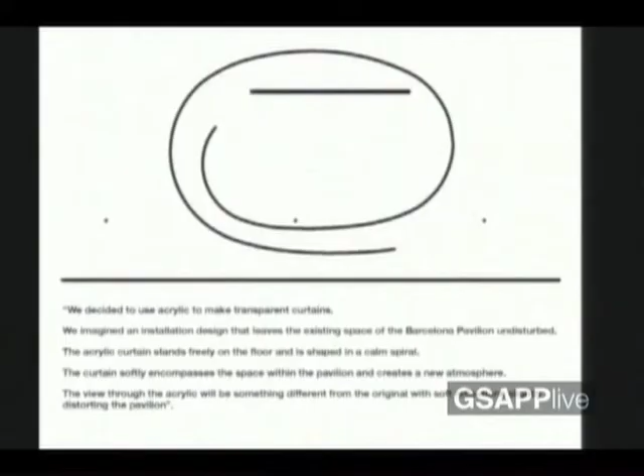2008, SANAA in Barcelona. They say: we decided to use acrylic to make a transparent curtain. We imagine an installation design that leaves the space of the Barcelona pavilion undisturbed. The acrylic curtain stands freely on the floor and is shaped in a calm spiral. It softly encompasses the spaces within the pavilion and creates a new atmosphere. The view through the acrylic will be something different from the original, with soft reflections slightly distorting the pavilion.

SANAA in the Barcelona pavilion could be considered the ultimate encounter, since SANAA is widely considered the inheritor of Miesian transparency—a challenge, as Sejima herself said when giving the commission, or we can say a return to the scene of the crime. The installation carefully marks a part of the pavilion with an acrylic curtain acting as a kind of crime scene tape, leaving, as SANAA put it, the space of the Barcelona pavilion undisturbed.

But what crime has been committed here? What has been cordoned off? Is it the free-standing golden onyx wall at the center of the pavilion, now wrapped up by this new transparent curtain in a calm spiral?

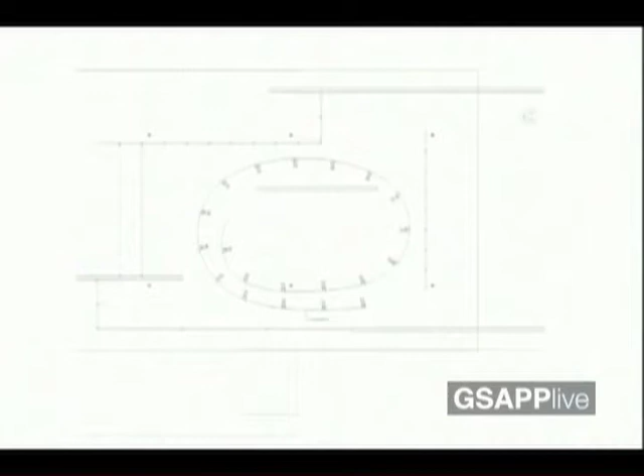Just as Mies somehow narrowed the entrance down, subtly constraining the visitor with a folded path, SANAA squeezes and spins the visitor between the narrow planes of acrylic that curve around until suddenly one is inside, facing the two Barcelona chairs—or rather they are facing us, as if the King and Queen were still there, sitting down, presiding over everything. There is a new chair.

Did you notice that? There is a new chair beside us. It is one of these SANAA plywood chairs with two asymmetrical bunny ears—whimsical, playful, uncomfortable, funny. A kind of angled, inexpensive school cafeteria chair facing the white, ceremonial, orthogonal, plush, leather and chrome chairs of Mies, in some kind of playful challenge.

Here is a possible reading of this chair of SANAA: we may have been inspired by the Playboy chair of 1970. The new chair, of course, represents SANAA, just as much as the old one represents Mies. The new chair belongs to the acrylic curve, while the old chairs belong to the marble, right?

But what do they mean when they say the pavilion is undisturbed? Something has changed—in fact, everything seems to have changed. The plastic spiral makes a new pavilion out of the old one. A pavilion inside a pavilion, transforming the other to produce a whole new architecture. The most famous pavilion of the 20th century becomes something else with all these additional layers of reflections—all these classic images embedded in the brain of every architect now have additional levels of reflection.

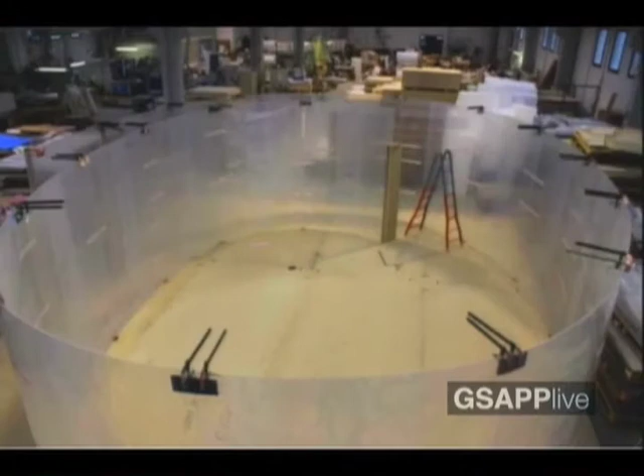Now, what SANAA does is return the curtain to the pavilion, or perhaps it's the pavilion to the curtain. The acrylic free-standing curtain recalls the silk and velvet cafe, a brilliant collaboration of Lilly Reich with Mies van der Rohe in Berlin two years before the Barcelona pavilion, where draperies in black, orange, and red velvet and black and yellow silk hung from metal rods to form the space. The cafe is a kind of prototype of the pavilion, if you think about it, in its radical approach to defining space by suspending sensual surface.

In the pavilion, the vein - here is Lilly Reich - in the pavilion is precisely the vein, the richly veined marble surfaces that take over the role of the curtain. The hard surfaces absorb softness. In fact, Mies pretends that these walls are curtains, as if they don't hold any weight, denying that they have any structural role, even if we know in the end that they did.

SANAA's project then reminds us that the Barcelona Pavilion comes from curtains, from a soft material. In the beginning, there was the curtain - of course, a Shakespearean idea of architecture. But the space that SANAA has protected with the curtains of the pavilion is precisely the center, the throne room, the space where the king and queen of Spain would have occupied.

They were supposed to sit down and sign the book there, but apparently they never did. It's funny, I don't know that I saw them do it. And they're so little that the two of them fit in just a little stool of Mies. When you see Mies sitting in one of the chairs, you understand the size of the chair.

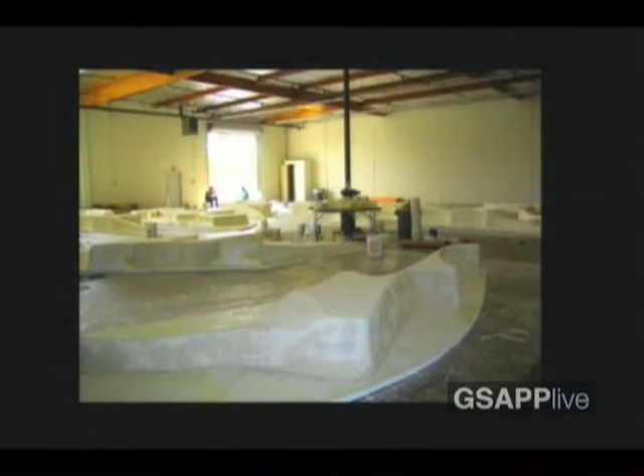This was the original prototype when we were planning to do the piece in fiberglass. Then the fiberglass only became the pieces on the ground. The other interesting thing is when you produce this in a vacuum, in a perfect laboratory manufacturing environment, you get the perfect shining composite - in this case, benches that look like little elephants.

We always like to show this kind of picture with people who look very scientific. Then you bring it to New York, to the humidity of New York, and you're accelerating the process while working with a very tight budget. Then the imperfection of the plastic allows the fakeness to start to appear, and the distortion.

So all these benches, when we brought them to New York, after the plastic configuration wasn't properly cooked, started to develop blisters and break the paint on them. When that happened, the guy who manufactured them literally was crying.

It was the same day that Nicolai Ouroussoff from the New York Times came to see the piece. He said, but that goes perfectly with what you're interested in, the grotesque and the horrific. And I said, well, yeah, of course, we did that on purpose. But what you learn is these things have certain properties, certain conditions, certain transformations, and that became a really interesting material for me to start working on.

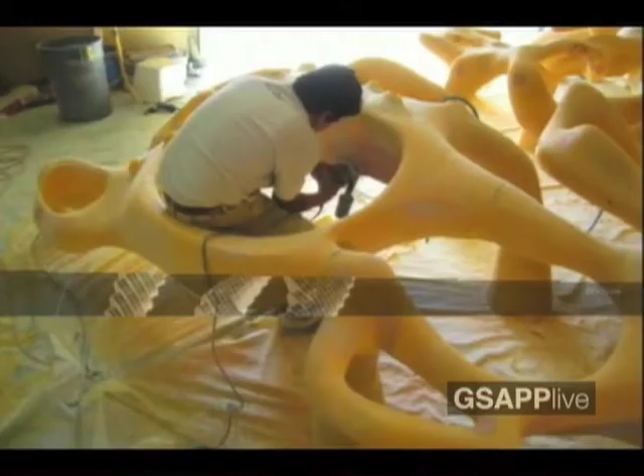So when we got another commission for a show in a museum, we started to think of it as a possibility to do that on purpose, so we accelerated the process of assembly. This was a regular one, originally milled, then sanded and finished by hand, then painted on top. But we accelerated the process, and you can see all the blisters start to merge. So over a period of time, the thing will be in constant flux.

As I said, I don't have a commitment or any intellectual reason when we work with materials. I'm much more interested in the form possibilities, in the arousal quality, in the material effects — whatever material will get the job done, that's the one we go with. Usually plastics and composites are the most flexible for the kind of stuff we want to do, especially at the smaller scale.

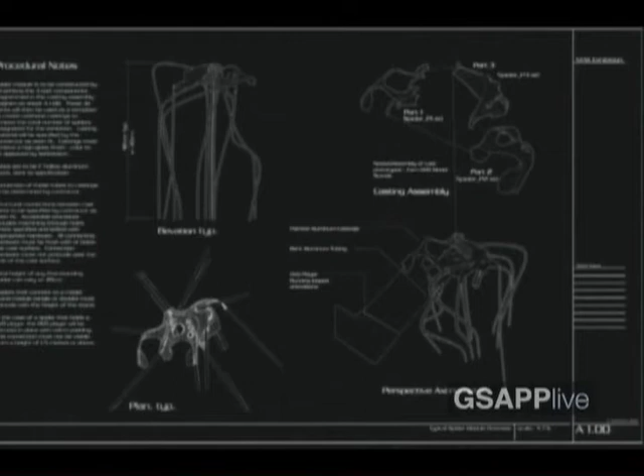I'm skipping some of the animations so we can make it on time. But this project became really important to me, in the sense that it took this notion of fake materiality to the extreme. This was a show we did at the Mak Museum in Vienna three years ago, and the idea was to produce a series of 18 objects to be placed in a gallery.

Originally we were supposed to cast them in metal, which was cheaper, but then the shipment was way more expensive. So we partnered with the Toyota Robotics Lab in Kentucky, and they produced this with plastic 3D printing, but at very high resolution, so they sound a particular way. I'm so uninvolved with this process that I didn't even go there to see how it was done — I have someone I work and collaborate with regularly who takes care of that.

Then we took them to General Motors in Detroit, and they chromed the plastic. So the thing really looked like it was made out of metal, but it was made out of plastic and incredibly light — we could send all of them in a cardboard box by FedEx for $500, which allowed us to have $15,000 more to produce it.

So that cut down the budget. Not that that's really important, but people throw numbers and money into this kind of conversation, so I thought I should do the same. And the trick was that the pieces were all the same — the only variation we produced was through the legs.

That gave us the series of effects we were trying to achieve, which was to capture this sense of movement, animation, a cinematic quality in architectural space. Even though the objects operate at the art scale, the effect is an architectural effect.

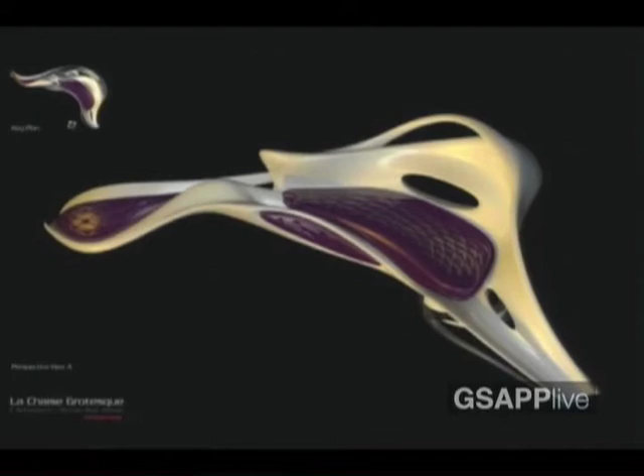This is another one that became a byproduct of a different project. The idea was to work with one of the iconic Eames chairs, and this was one of the first experiments we did with scripting, using it as a virus that would attack an existing condition. We start with the Eames chair, and through scripting it deformed into something else. This was commissioned by the Art Institute in Chicago.

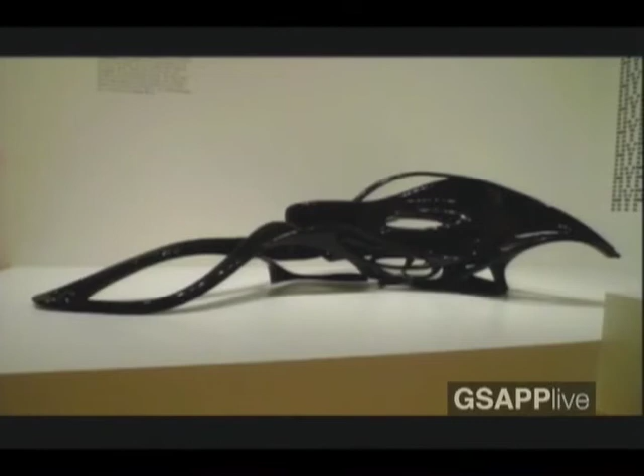The last one, the misfits, is what I'm more interested in right now. It has less and less to do with that problem. It was generated from the project we did for the John Lautner exhibition at The Hammer.

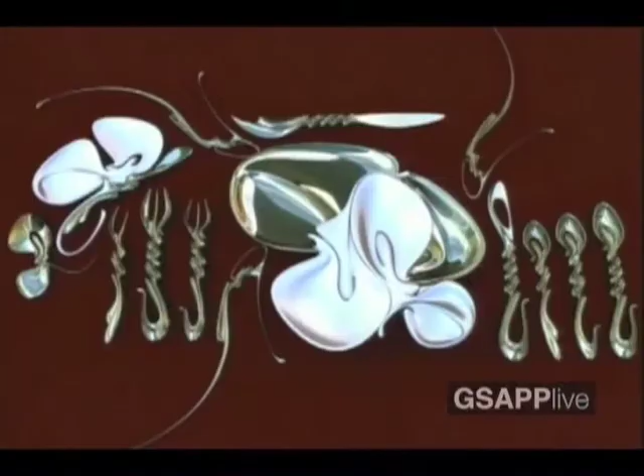It then took form in the first version we did for another silverware collection for Alessi. As I mentioned, I'm not as clever as Greg at developing one logic for it. We designed it more old-school, and made prototypes in plastic, but the molds to do it in metal were too expensive, so that idea didn't fly. But we used that chrome plastic technology for an installation in Selfridges in London.

And rituals is where we're going now—it has to do with this desire to start incorporating a certain raw quality into this kind of high-end way of producing and designing. The idea came from, for the next version of the Alessi silverware collection, the Dead Ringers of Cronenberg.

So the new version we did for Alessi is called Instruments of Manner. There's a long animation I won't show, but it covers everything from bottle openers to silverware. You have to use them in a particular way so you don't get harmed. But that interests me, because I think it changes the protocols of how you eat and relate to others.

I'm trying to convince them to make it out of plastic and chrome, for high-end hotels and airlines. We found a place in China that will manufacture the plastic and then we can chrome it. But they keep insisting on doing it in metal, so my sense is this is going to die like the other version. But the show at the MAK triggered something I'm very interested in—again, this plastic posing as metal.

So you will see here, I was thinking in rubber chickens, and so I thought maybe rubber cows. In this case, the pavilion got reduced to 30%, and 70% will be garden.

Again, the plasticity of this, or the animation about it, is the idea that you can manipulate and stretch anything toward different aesthetics. To be honest, the material aspect of that notion of plasticity is more influential on the design quality. There has been more influence in the way that we produce. But one way or another, you always find a way to relate with that.

So all the pieces that we're doing outside, which are probably the only ones that will get built, look like these - eventually they're going to have to be some kind of fake material posing like that. That quality, which I think was so diminished in the early 60s and 70s about plastic, is what I found the most interesting and fundamental.

This idea that things are not what they seem to be - maybe that has to do with, it's almost criminal against modernism, but looking at it again, I always have the sense that modernism was a little bit like that with material.